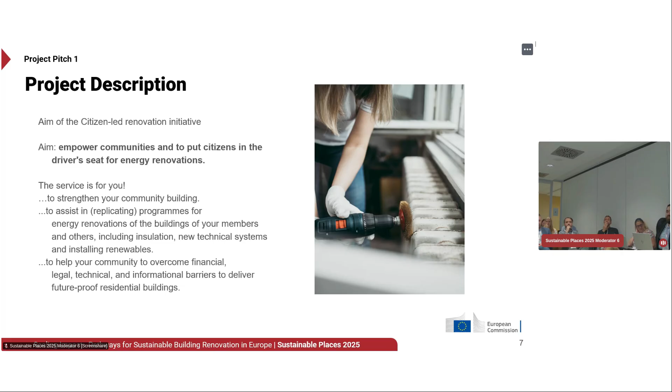As I said, the main aim of the project is to empower the energy communities, municipalities and one-stop shops. We make it more inclusive in order to put the citizens in the driver's seat for energy renovation. So basically we want this service to be for them, for you, for everyone working and supporting, in order to strengthen community building, to assist in programs, maybe replicating programs as we're having a lot of exchanges and a lot of networks of energy communities. There's happening a lot of exchanges, and of course to help them overcome financial, legal, technical information barriers in order to deliver future-proof residential buildings.

These are the main pillars we have in the full support and the whole consortium. We're supporting in 6 different pillars. As you can see, we have project management, administrative and monitoring, and of course business case development, ecosystem build, project pipelines and investment plans, which is the most important part I'd say for the future, as we're supporting all the energy communities building their own business plan or remodifying them. We're having preparation of the technical design, and of course communication and engagement - that's why we have Pia and colleagues, thanks first of all for supporting and organizing all of this, and supporting the project as well.

As I said, what we offer - what was the main purpose? Basically we have the pilots, the 6 pilots we mentioned, and we're supporting them with the 6 pillars I mentioned previously. But we also have the learners, and the learners, as I said, are energy communities, and we're guiding these energy communities in developing their capacity for initiating renovation projects. So we're motivating them, pushing them a lot with one-to-one consultancy by our experts, with interactive activities, presenting learning packages, how-to guidance and those kinds of things, in order to fully assist them in the renovation journey they have to deal with.

And of course we have the followers, which are less involved in communities, but still one of the most important parts. Right now we have 38. So it's basically communities interested in exploring the concept of citizen-led renovation, having citizens in the center, and the energy communities. These energy communities are provided with insights, learning materials, one-to-one guidance sessions, and of course networking opportunities. As I said, we have a lot of networks of energy communities - if you count everything up, it's more than 60. So there's a lot of exchange between the energy communities happening, which is the main goal and purpose of what the Commission and the DG wanted.

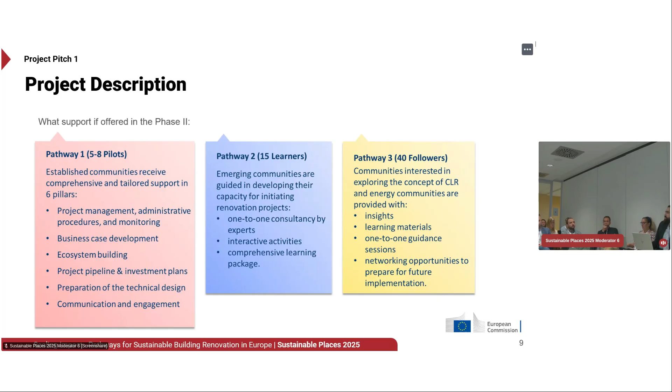Really briefly, mentioning the pilots we have right now - first of all the Italians. The first one is Castello Green House, which is a cooperative renewable energy community with a huge focus on RES and eco-sustainable, participatory renewable energy sources. Then it's the Antrodoco energy community, which is a municipality-led energy community promoting energy autonomy, focusing more on public buildings, rooftop solar PV installation, with a biomass district heating network.

We're having the REC of Postua and Guardabosone, which is basically two villages, two small towns, that both developed renewable energy communities, and they wanted to join forces to collectively gain this experience, being supported by the CLR, and form one joint renewable energy community.

Currently, they are engaging 15 buildings, including households experiencing energy poverty, with comprehensive energy upgrades and similar measures.

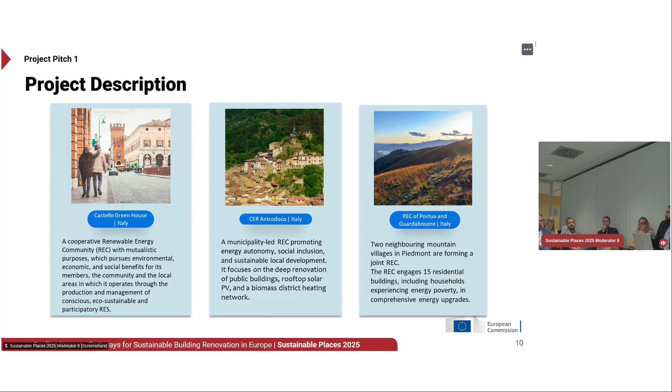We are having the municipality of Alsómocsolád, which also has an energy community, but we decided to include the municipality itself to show the inclusivity that the CLR wants to offer, as our solution is not only targeting energy communities, but also municipalities, targeting one-stop shops - basically a proactive rural municipality, integrated behavioral change, digital innovation, and strategic planning to launch a renewable energy community. We're also having Girona, which is basically the provincial council, a governmental council.

Girona is supporting 5 local energy communities, so it's quite inclusive - a big pilot, one governmental authority with 5 energy communities. There we are focusing on setting up a robust ecosystem of financial and technical partners, assisting them with energy auditing and all the retrofitting guidelines they want support with. They have a lot of old historical buildings which they want to retrofit.

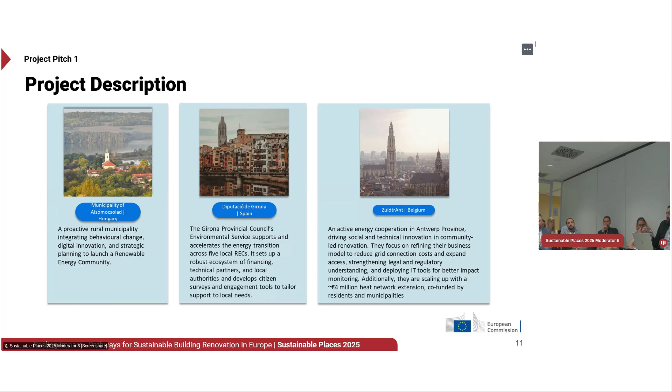And then there's ZuidtrAnt, which is in Belgium, in the Antwerp province. Basically what they want to achieve is support on refining their business model - as said, this is one of the core parts we're offering as CLR. But they also want to scale up with approximately 4 million for a heating network extension, which will be co-funded by residents and municipalities, and we're guiding and supporting them a lot with this grid connection and expansion.

Next is the Multicare project, which will be presented by Lucas. Lucas is actually a project manager and social market researcher with more than 15 years of experience.

The numbers are going to be there - you cannot see that he's that old.

He has experience in international projects under various European programs. His current expertise focuses on market analysis, social research, biometrics, UX, UI studies, and co-creation. In Multicare, Lucas, as I correctly remember, is co-responsible for the dissemination activities and the social assessments of the renovation.

Lucas: Thank you so much for the introduction. I'm going to present Multicare, especially focusing on a few aspects that are the core topics of today's session with regards to circularity, resilience, and social inclusion.

There is only one slide summarizing the project, so I'm not going into the details. Everything is on the presentation and on the website if you are willing to enter it.

Moving forward to these topics, the first one was circularity. In terms of Multicare, we found circularity here especially by producing the low carbon facades and multi-layer exoskeleton for existing buildings as well as new build ones. Circularity in our case means that we're trying to use recycled timber, for example, to build the facades, and those facades are designed to be a plug-and-play system.

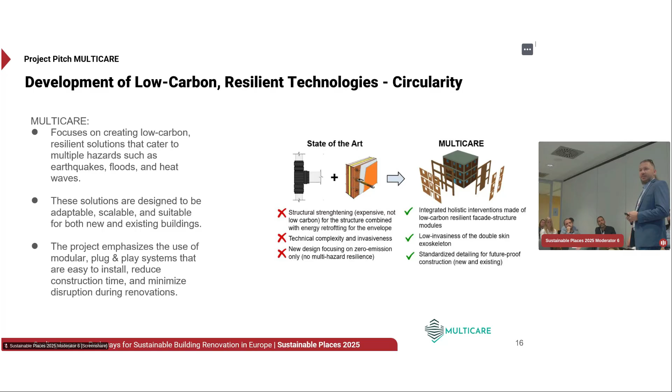So if the building, for example the main core construction, is getting older and seems to be nearing destruction, you can unattach this plug-and-play facade and move it to another building. It means that if the main building is in bad condition, you can reuse the facade elsewhere, making the costs much lower. Plus, of course, using recycled timber also makes it more circular.

The second aspect of the workshop is to analyze resilience. In Multicare, as the name suggests, we have a multi-resilience approach, changing from the state of the art by focusing on different hazards. We are merging them all together - in our case heat waves, floods, and earthquakes.

By making digital tools as well as multi-sensors, we are trying to combine this into one solution. The exoskeleton facades will be used for all three hazards, not only for strengthening the building construction against earthquakes, but also to provide more effective indoor air quality in case of heat waves by attaching another layer.

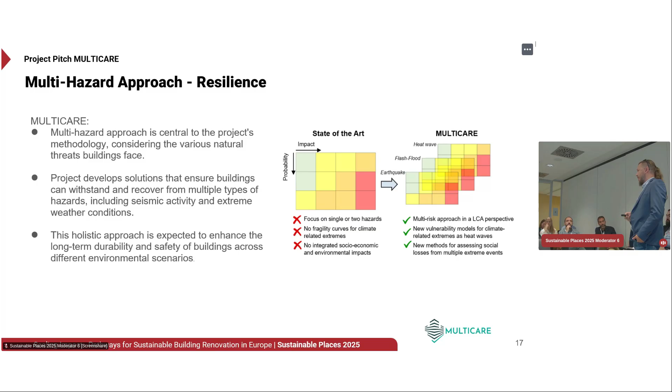For example, using automation of the blinds - when the sensor receives information about upcoming heat waves, the blinds go down. So that's one of the solutions we have.

Another aspect of the workshop is digitalisation. As I said, we are focusing on all three hazards, and by providing a support decision tool, we'll be able to send information to citizens via a special mobile app, informing them about upcoming hazard events.

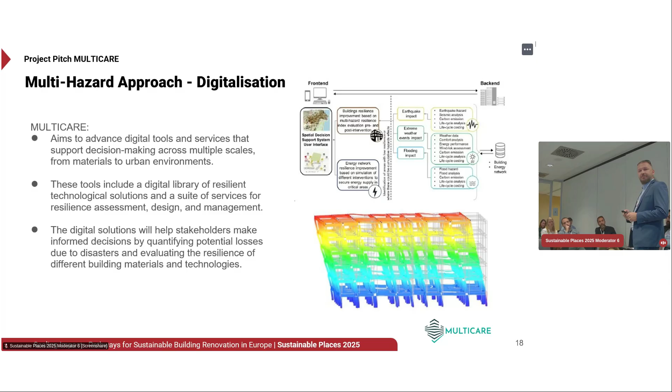And what is more into my part of the MULTICARE is how to involve the citizens, or the residents in particular, to be more active. So first, they are a part of the co-designing teams. It's not like technicians give them an already made solution and say this is how your facade will look after our renovation process, but we involve them to co-design this.

One nice thing we could say is that after measuring the building, thanks to Napoli University, we recreate almost the same part of the building in the laboratory, which allows us to measure the seismic damage of the building. So we recreate a part of the already existing facade, then we provide a seismic test. So the exoskeleton multi-layered facade is tailored for each building separately, depending on the materials used for the as-built facade.

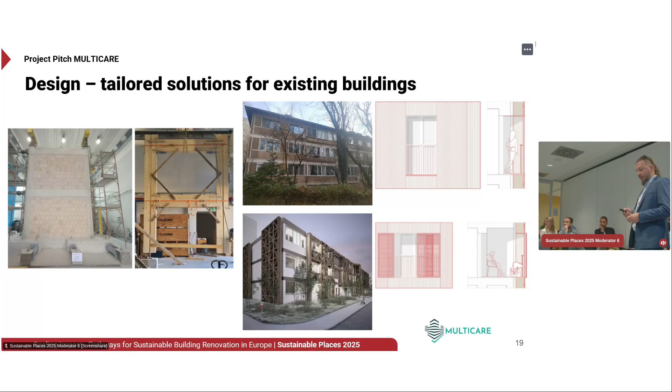And another aspect of the social inclusion is to gather the residents of the building, showing them what kind of facades they can have on their building. So there's an app for this, and during the workshops, the citizens are enabled to choose between different options.

What are the main focus? So, for example, we can imagine that in the social inclusion, social housing, they will go for more cost efficient ways, not focusing on many other add-ons that will make the facade more costly. But in that way, there is no single solution that can be used.

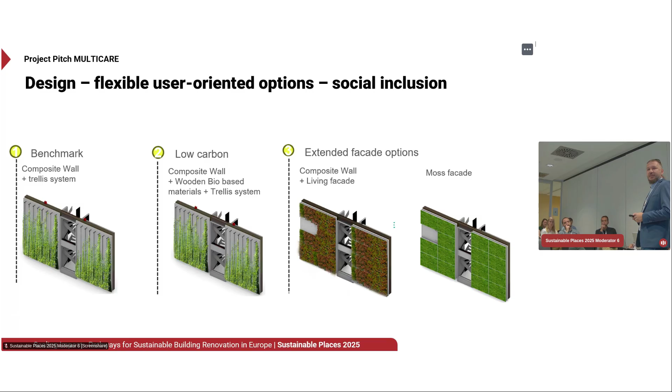And I think we found quite good feedback from the residents that they can really design their facades. They can choose among different materials that can be used, colors, additional attachments, sensors. They can choose, as you can see, a green facade. So there are many options for them. It's like playing a bit with Lego bricks. So also some gamification could be added to make it easier for the residents to design the facade.

So that was my approach for this workshop, showing these four topics, let's say. Thank you so much for listening.

Thank you very much, Lucas. Indeed, it was quite important to see how this low carbon solution could fit into the real world and could provide the safety that is quite important for the social housing perspective.

Next, we're going to have Miguel. So, what to say about Miguel? He's going to present to us not a project but an organization, basically Mike Borgeson - I hope I pronounced that correctly. He is the director of Future Solutions and public affairs of the Swegon Group. He drives the strategic process in these areas with great expertise in HVAC and building automation, and is truly committed to advancing indoor climate solutions within the company and across the industry. So, Miguel, the floor is yours.

Thank you for the introduction. I would like to start by introducing you to IAQS, or Indoor Air Quality Society, which is a relatively new gathering where we're collecting experts within the industry and research regarding the field of indoor environment. It's a non-profit organization based in Belgium, with a lot of different members across IAQS that cover a broad field of indoor climate, and that will be my focus for this short speech as well.

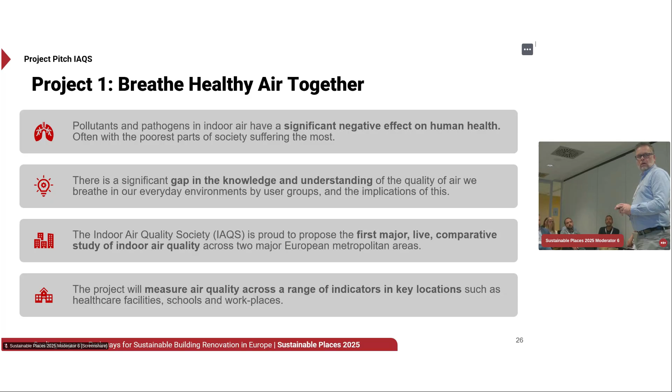The ambition with this is, together with computed simulations, to detect the current situation that we actually had, so we have a good base for the different decisions that we need to take in the future.

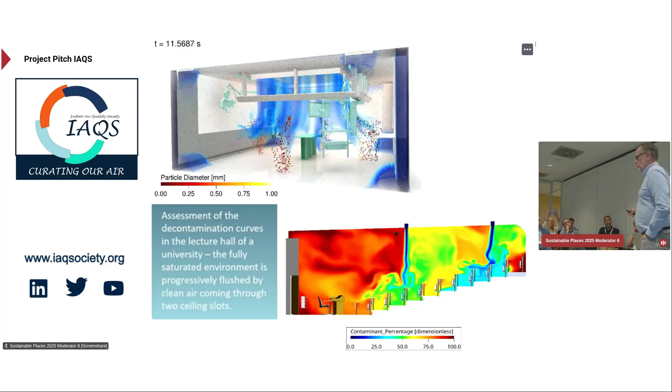I will come back a little bit to indoor and outdoor aspects in the next project I will present as well. But even in this case, it will be very relevant to find the kind of base level for where we are today versus where we would like to be in the future.

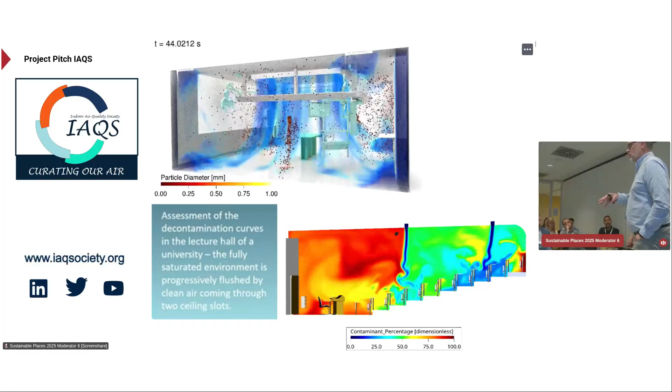Talking about resilience, health and well-being, and of course basing that towards energy efficient solutions for buildings, since that is one of our aim targets. So the aim with this project will be, and the project participants will be researchers and industry combined.

And this will be funded by the participants doing the study itself. And I think that is one of IAQS's strengths, to combine the knowledge from the industry itself together with research doing the kind of more strategic structural measurements. So the increase of knowledge and awareness is the aim.

We will show comprehensive data for a time being in the surroundings that we actually will start measurement. And of course, the ambition is to find the tools to increase health, to increase productivity without increasing energy use, rather decreasing energy use and going more towards our trend with net zero buildings. So that is a super interesting project that we will drive within IAQS.

And if you would like to know more, I'm here, of course, and I will be here after the session as well. The second project I would like to introduce as well, which is a really interesting way of also looking more or less into the same topic of health and well-being, but from a total different angle.

This is a project we're doing together with Philips Foundation and the Cardiology Centers of the Netherlands, where we try to find the correlation between indoor-outdoor condition versus health issues. And in this case, we're talking about heart diseases.

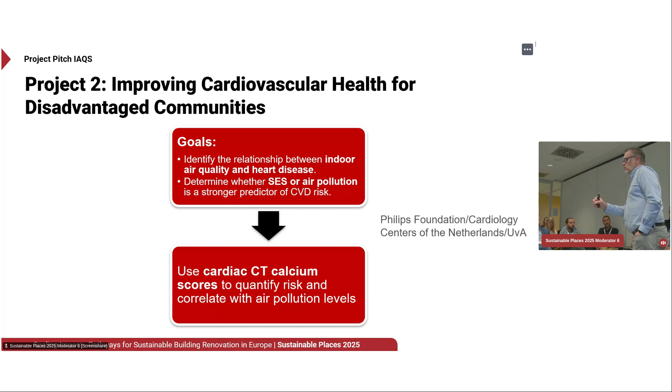So we will try to find out if social economical status and maybe air pollution has a kind of interference with each other, if we can see and draw some conclusions regarding this kind of combination. And in this case, we're using cardiac CT calcium scores to determine the health perspective, and then we will combine them, as I will show later on.

Why is this important then? Yeah, because we know, and this is good in one way, because we are in Milan, it's one of the worst areas in Europe regarding outdoor pollution. And that has an effect on people, and we need to start to determine how big that effect is.

And we, of course, know already that we also have indoor pollutants as well. We have tobacco smoke indoor, we have chemicals we're cleaning with, we have furniture that we are painting, we have building construction materials that we touched into just recently that also will have an effect on this.

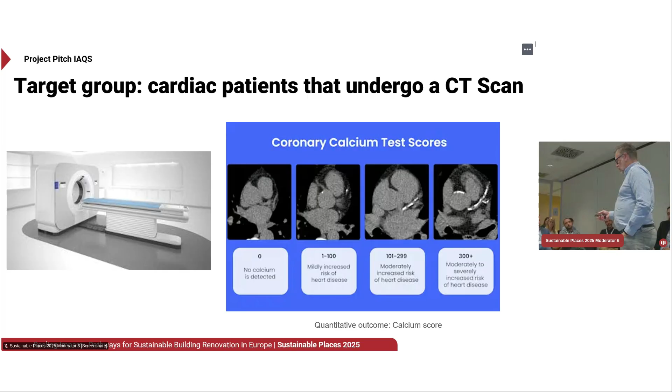But the unique part of this is the correlation together with the kind of diagnosis teams, where we get a result from CT scans when we can see the calcium scores on a relatively huge number of patients, and using that together with measuring their homes, both their outdoor condition and indoor condition, and then you can correlate those data and see if we can draw a conclusion.

Because in the end, the ambition is, of course, to find policy guidance documents that help the future legislation and future policies to drive in the right direction, and also to realize how dangerous it could be if we're not taking care of the indoor climate properly in the end. So supporting public health policies is the outcome, but I guess there will be a lot of interesting data that we can publish during the study itself.

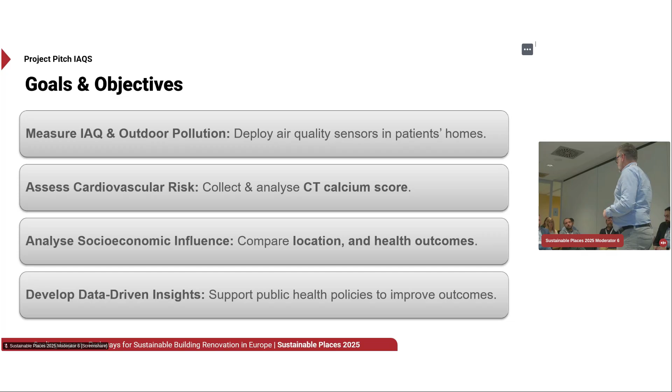Thank you very, very much, Mikael. I think most of you understand this essential health dimension that needs to be included, that is already starting to be included in the renovation procedure. And how important it is to have all these sensors to provide us the necessary guidance in order to live a better life inside the buildings, which is basically the purpose of the renovation itself, to assist the whole living conditions inside the house.

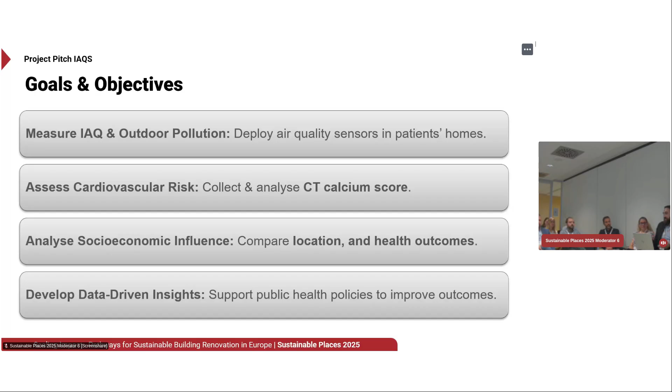I noticed some smoking reference there, so I'd like to learn more. The next one is going to be quite interesting - don't be afraid of the title. It's the digital and physical incremental renovation packages, systems enhancing environmental and emerging behavior and user changes. Arnold Alonjay is going to be our speaker for this project. He's a research engineer in building energy efficiency at CEA, based in the France National Institution for Solar Energy.

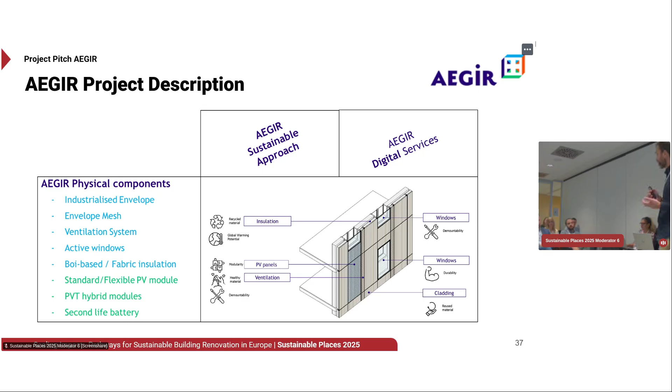All these developments need to be supported by a sustainability approach and a circularity approach, and digitalization might help combine all these aspects. So for that, it's quite challenging because it spans many different topics and skills.

The project has 29 partners in order to do the research and then demonstrate it on 4 real buildings. We have a school in Spain, an elderly people's residence in France, some social housing in Denmark, and individual houses in Romania. We cover a broad scope of partnerships, from companies dealing with materials and components, to some more specialized in systems and digitalization, through to construction and demo owners in order to involve the real building owners in the process. We're also supported by RTO research. We are in the last year of the project, so we will start to implement the development into the real buildings.

The strategy on circularity regarding AEGIR is to try to define the most appropriate KPIs, because when you speak about circularity, you have plenty of different KPIs to look at. So you need to select a few in order to be able to quantify them from the beginning of the project, and say okay, we are at different levels: we develop a component, then assembly and buildings.

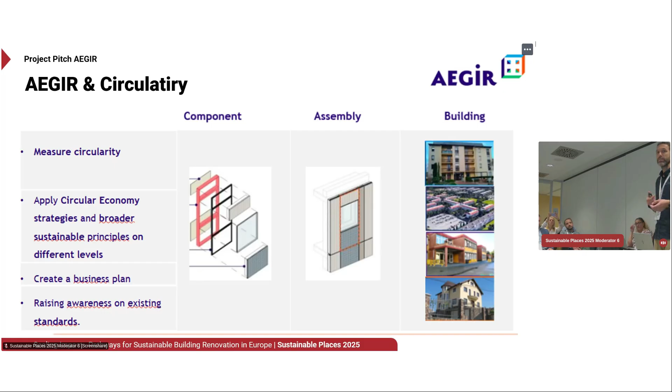Regarding the digital tools, the objective is quite ambitious in AEGIR, we try to have a quite broad approach, with some dedicated digital tools to support the physical components development. So we have a prefab component in order to calculate what is the best option in terms of life cycle analysis. We have a building facade configurator in order to facilitate at an early stage what is the typology of facade we want, because we have a modular approach. So depending on the existing building, you cannot push standard solutions, so you need to choose what is the best modular approach.

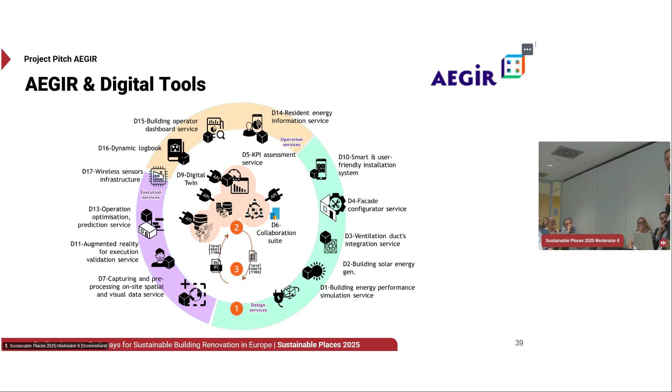So we have very specific tools supporting the solutions at the design phase, but we also need tools for the operations and the application of the physical component. One of the main challenges is also to have data going through the different tools, but not every actor who has his own data fills it in the digital tools. So the collaborative suite with the common data environment tries to get the link between all the tools, structured around a unique set point where we put the data.

And yeah, I think that was the main challenge.

Thank you very much, Arnold, for this amazing presentation. At least for me, it relates quite a lot with the perspective that we want to offer. It's important to see how this retrofitting model could come to the real world. If I remember correctly, it's 4 demos, so it could be quite a few. So it's going to be important to see how this is going to take place in the real world, with all these variations to be established.

We're almost there, only 2 projects left, and then you are coming to open floor.

Now we're going to speak about the REC House, which is basically about accelerating the European renovation rate. If I recall correctly, the EPBD, the Energy Performance of Buildings Directive, states that this renovation rate for Europe is 1%. So we're going to hear from Javier Antolin how this project is trying to accelerate this percentage.

What to say about Javier Antolin? He's basically an industrial engineer with a specialty in mechanics in structures from 2010, with a master's degree in management and occupational risk prevention, quality and environment in the fields of industrial safety, industrial hygiene, ergonomics, and psychology, both gained at the School of Industrial Engineering and the University of Valladolid in Spain. He also has a postgraduate in energy simulation of buildings from the University of Barcelona, and he's a certified measurement and verification professional, a certified energy auditor, and a performance measurement and verification analyst since 2021 from EVO, the Efficiency Valuation Organization. And I think the most important is that you are the coordinator of the project, right? Okay, so we're going to hear from him, thank you.

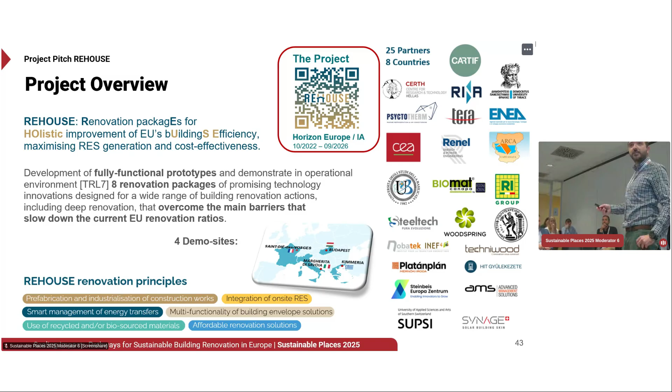Also, our solutions are multifunctional, meaning we are not only covering one function, but several functions with the same solution. We are using recycled and biosourced materials in order to increase the circularity of our solutions. And also very important, our solutions are affordable for the end users, so we are taking into account cost effectiveness.

The main objectives of the project, as you can see here, align with the main topics that we have today. First, we are considering people at the center of the stage, so we consider the needs and requirements of people when developing our solutions. For this, we have created social task forces, which I will detail later.

Also, one of the objectives is to increase our TRL levels from before the project, from TRL 4/5 to TRL 6. So we will be doing this in the labs, or in the main facilities of the developers of the renovation solutions, to achieve this TRL 6.

Also, we are using digital solutions. For this, we are considering the BIM-based workflow, and also integrating the IPD methodology in our approach. This means we are considering all phases of construction, from design until the operational stage. We are also considering the end of life, though it will not be covered by the project, although we will be creating guidelines to define how we will achieve this end of life for our solutions.

We will be deploying our 8 renovation packages, as mentioned, in 4 demo sites with the idea to validate them at TRL 7. So we will achieve TRL 6 in the facilities of the developers, and then achieve TRL 7 once we deploy these renovation packages in our buildings, validating them, getting data, and checking that everything is working well.

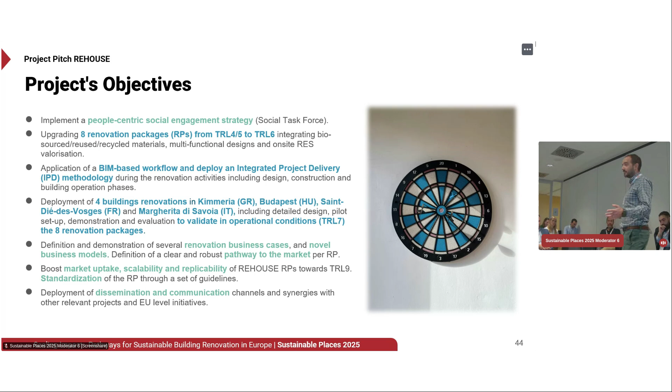Now I will try to give you some points on how we are aligning our project to the different topics we are covering today, in order for you to have some ideas on how the project is moving towards these specific topics. So the first one, circularity.

In our case, we are considering this aspect because already in the design of our renovation packages, we are considering circularity by using, for example, recycled components, or also using waste materials, or waste goods that could be part of an insulation system. So in this way, we are considering this circularity.

Also, as I mentioned before, we are creating guidelines about what to do once these systems have arrived at the end of life, or how we can dismantle everything, how we can reuse the things, how we can recover the materials. Our systems, as mentioned before, are prefabricated, and are made of modular components.

So this means that everything can be taken out once the end of life is arrived. This is for circularity.

For digital tools, also in the project we are working towards this part. So we are creating a digital building logbook in which we will be storing the data for all the project phases, covering from design until operation. We will be collecting all this data in our digital building logbook.

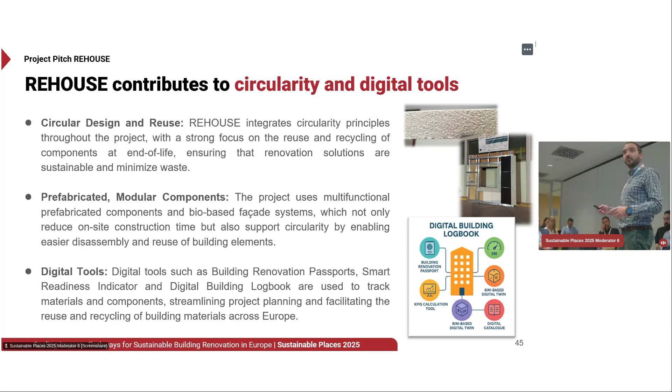Also, we are working towards social inclusion, mainly taking into account the people as the center of our stage. As I mentioned before, we have defined social task forces for each of our demo sites. These are specific groups that work together with the people living in the buildings in order to understand what they require, what they need, and take this into account in the design of our solutions. So we have been working very closely with them.

Also, in terms of resilience, we have defined, as I've already explained, multifunctional prefabricated components and digital modelings that will allow us to increase the resilience of our systems.

And also we are contributing to policy alignment. This project is very aligned with the Renovation Wave EU strategy, with the idea to increase at the end the EU renovation rates. At the moment, the EU renovation rates are very low, so the idea of this project is to give tools and solutions in order to increase this.

Also, we are working on standardization. Our idea is to take into account the standards in order to have more possibilities to replicate our solutions, not only to use them in our demo sites, but also to expand this scope to other contexts or other countries.

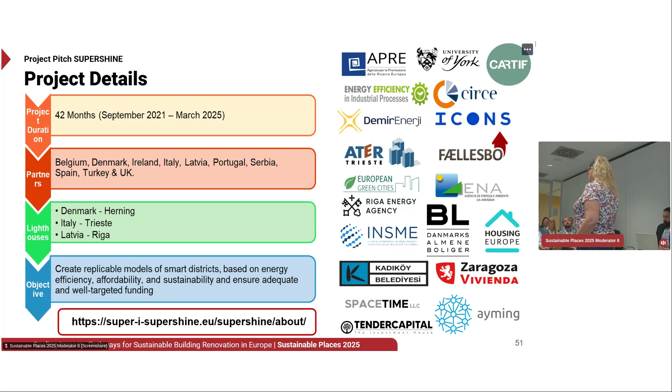As part of the project, we have been taking care of various aspects. There are colleagues focusing on the technical aspects, the type of interventions that could be done, and they're actually starting to put these in place as we speak. We're talking about deep renovation involving walls, windows, and in Trieste we also have green roofs and floors, to increase the energy efficiency of these buildings.

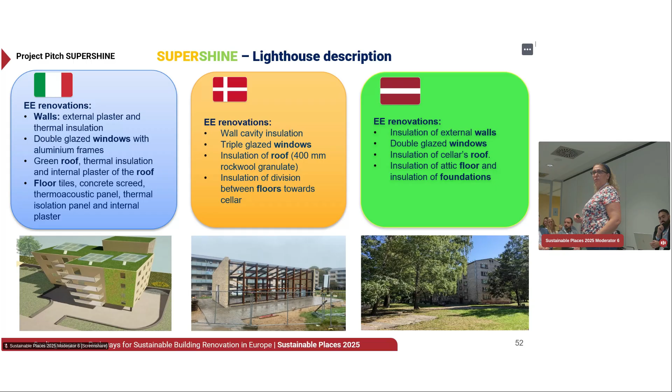The colleagues from Cartif focused on technical aspects, other colleagues on the environmental impact, and our team has been focusing on how to fund this type of intervention. The key thing is that our partners, the social housing associations, are the ones who are going to perform these interventions. They've told us what their finances and constraints are, and together we've been working out the potential cost of this intervention and considering various ways of funding them.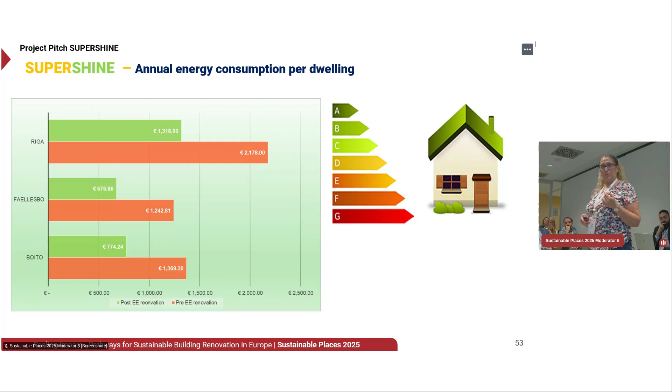Probably the next slide is better, looking from the point of view of energy savings. This line represents the energy savings coming from all the interventions, and then we broke them down into the various components: wall, windows, roof, and floors. Why did we have to do that?

Originally, the thinking is economies of scale — that's the clear approach we should have from an economic and financial point of view. Obviously, doing all the interventions together would be financially the most effective way. But there is a but.

I think the most interesting aspect of our project is that, by collaborating with the social housing associations and also with the association of tenants — in the case of Denmark they are the same, because the tenants actually own and are the social housing association themselves — we realized that sometimes it's not possible to do all interventions together. Sometimes they need to do the intervention one by one because of financial constraints and constraints related to the people who are really living there. They cannot move, in order to decrease the impact on their day-to-day life, so they can't do all the interventions together.

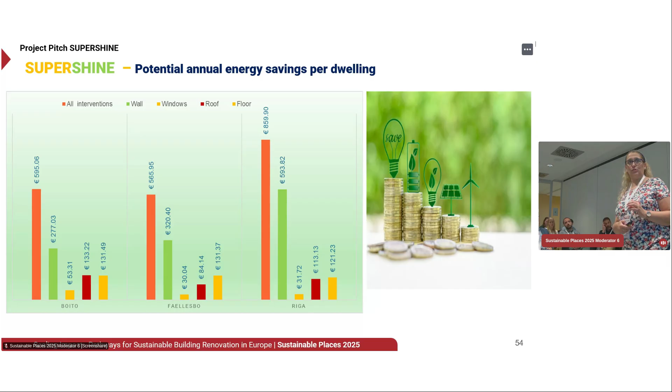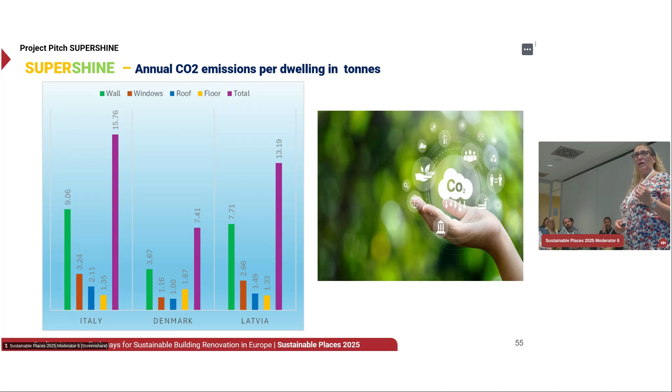So we had to do the financing not only considering the whole package together, but also splitting the various interventions. Obviously, there are savings coming from both approaches. The CO2 emissions are related to that as well, obviously, with increasing energy efficiency.

We have a huge decrease in CO2 emissions. So we have been calculating the potential energy savings and transforming them into financial returns for the whole period that is required in order to pay back the intervention.

And we have been experimenting with various financial models, particularly public-private partnerships, because our goal is to split the risk, to share the risk between public associations and private sector funding. The contract that is working best for our lighthouse districts is shared savings, where an energy service company is actually borrowing the money and providing private funding.

And it is also taking the risk of the case where there could be years when the energy savings are not enough to pay for the cost of the investment. But this, on balance, is balanced out over time during the payback period of the investment.

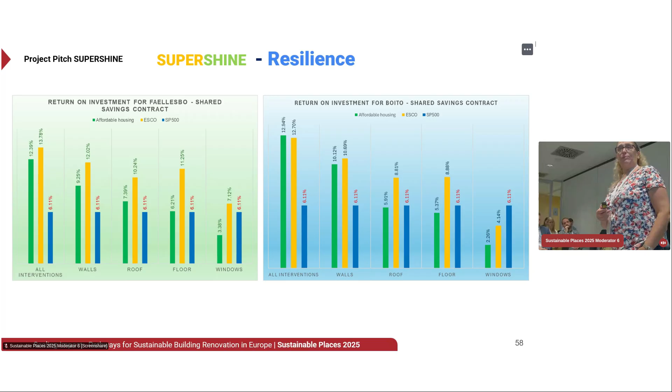Okay, thank you. So we have done that for all our lighthouse districts. But of course, both the people, sorry, I'll just get a sip of water. I speak much.

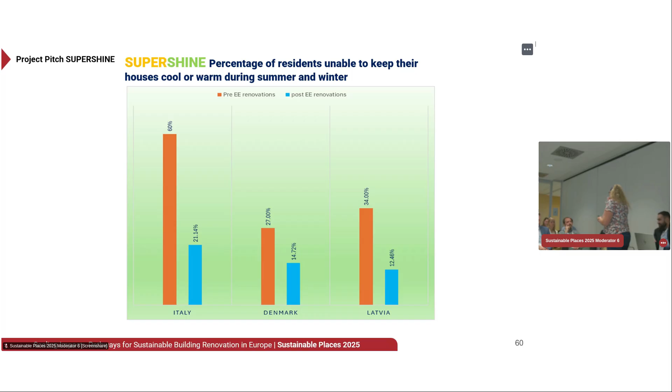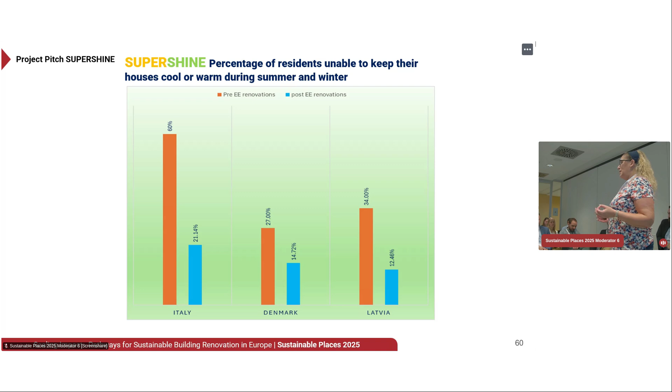The thing that is most important for the people who are living there is to decrease energy poverty. And of course, that is the language that they understand. One of the things we have been discussing with them, because they've been involved since the beginning, is that none of this has been done without collaborating with the associations of tenants.

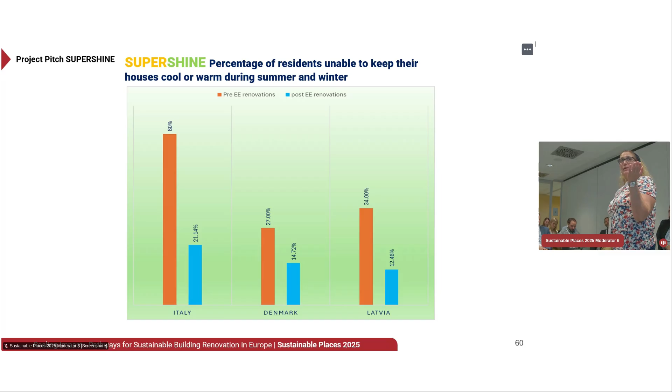So this is one of the indicators of energy poverty, and you can see that energy poverty decreases massively after the intervention.

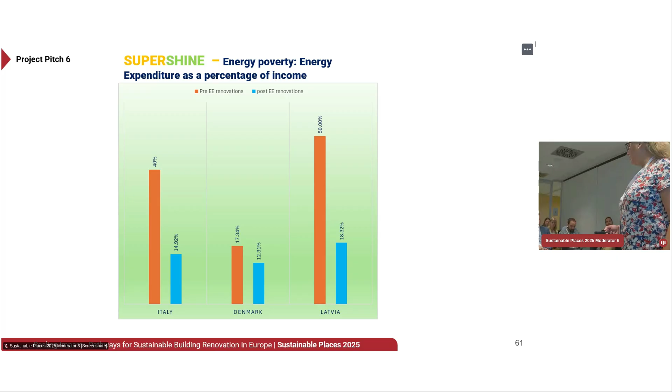And this is another indicator: energy expenditure as a percentage of income, again another indicator of energy poverty. You can see that in Denmark it decreases much less because the starting point is much lower. But for Italy and Latvia it's particularly interesting.

Latvia, they're great, they're really, really on board with this. But for them, you need to speak money, otherwise there's no going anywhere. I'll tell you more details about it later, but we are collaborating with local ESCOs at the moment in order to put in place part of this investment and actually involve private sector financing, starting to collect some money for the first step.

Okay, that's all from me. There were some other slides, but thank you.

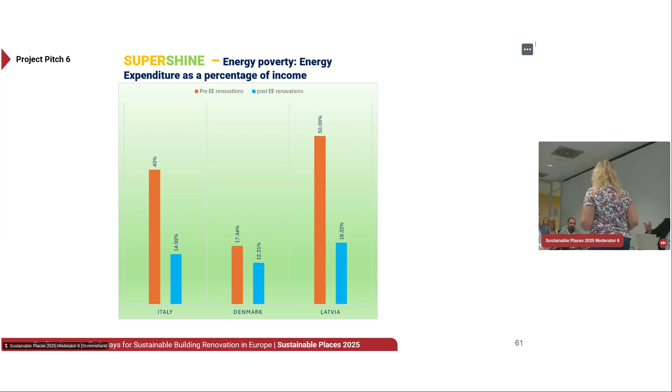Thank you very, very much, Paula, for highlighting how this blending financing perspective, with the collaboration with the ESCOs, which we are doing as well in the CLR, is really a way with these energy contracts to achieve energy renovations without needing that much initial funding in order to have these energy savings in the end.